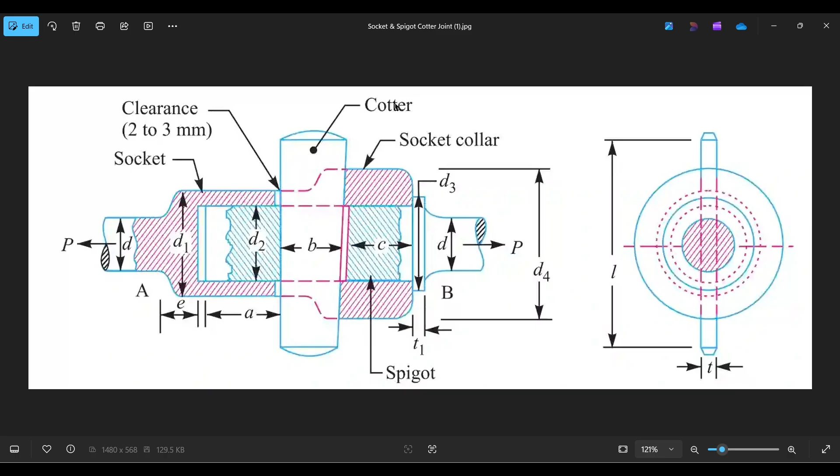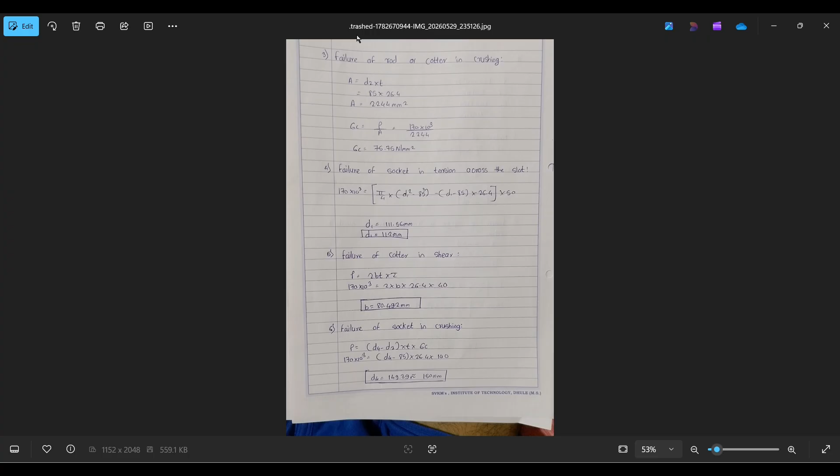These are the dimensions that we calculated to design the cotter joint. So okay, in your screen you can see these are the calculations that we did. All these calculations are required to design the cotter joint, to give the dimensions to each and every component.

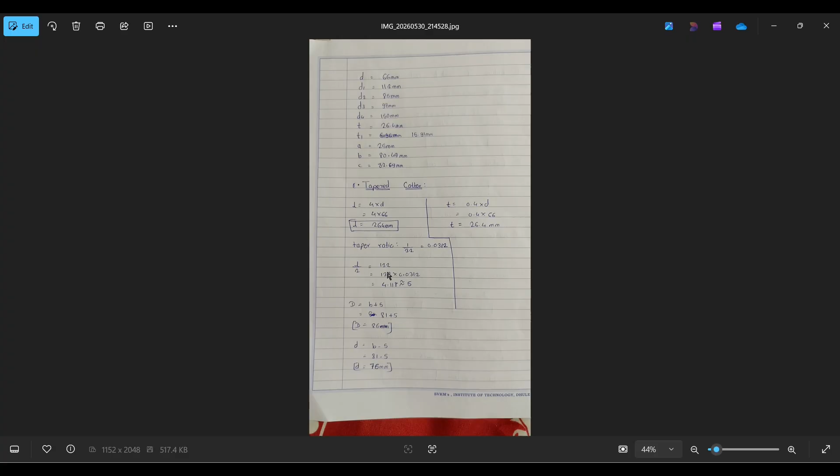So this is the last page and all the dimensions are given here, and also we calculate the dimensions for the taper cotter: the length and the thickness and other dimensions to design the taper cotter. Okay, so now we are going to design the cotter joint. For that, go to file, new, part.

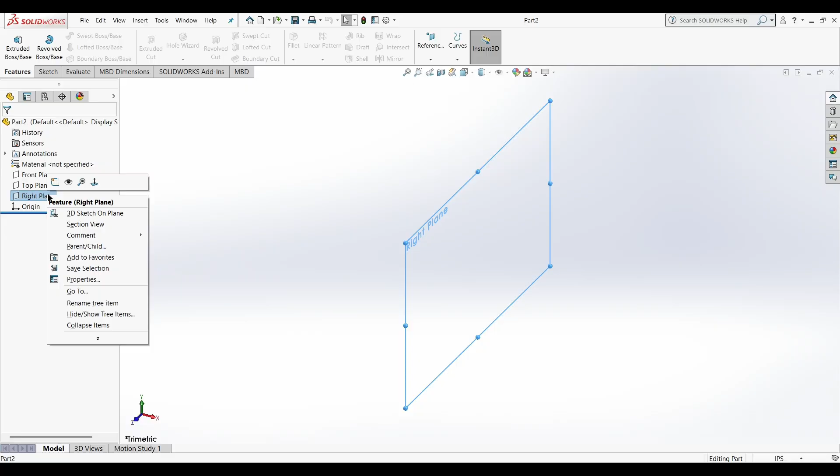So for that, click on the right plane, edit sketch, go to the sketch and select the circle, draw one circle here, and also make sure that the unit is in mm. So again, right click on the sketch and say edit. So give the dimensions. First we are going to design the spigot, which is one of the components of the cotter joint.

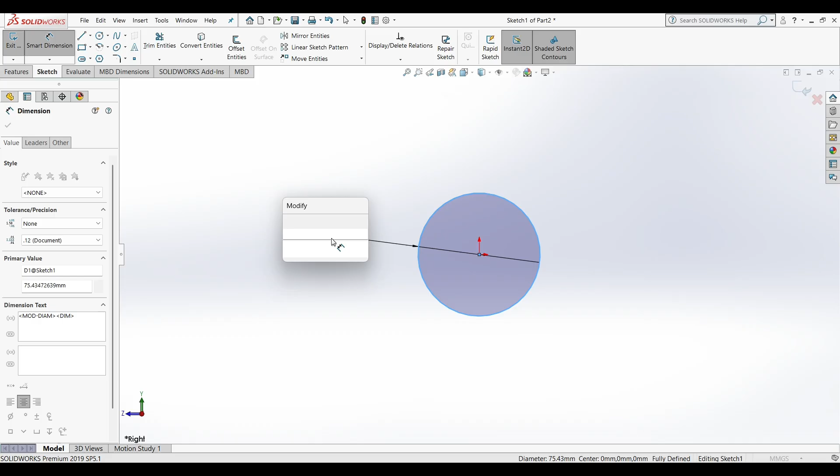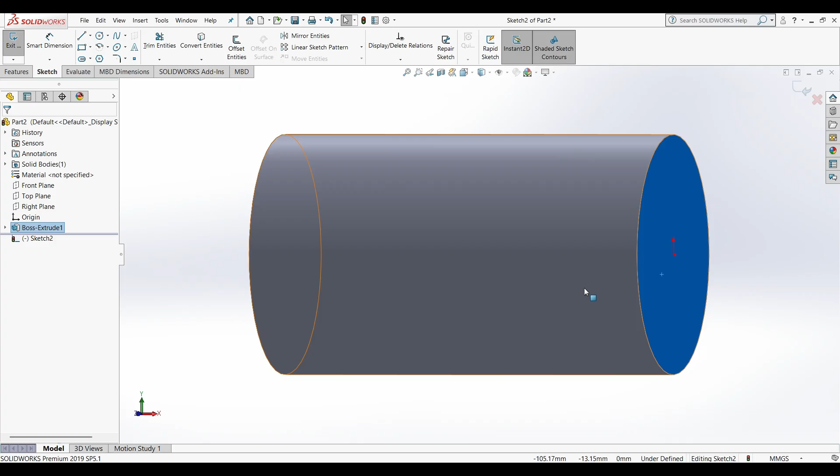Assign the dimensions. This is 85 mm. Say yes. Go to the feature, extrude base boss. The length of this spigot is 145 mm. Okay, say yes. Now select the surface of the cylinder, edit sketch, draw one circle here, go to the dimensions, give the dimensions. It's around 97 mm. It's the collar of the spigot.

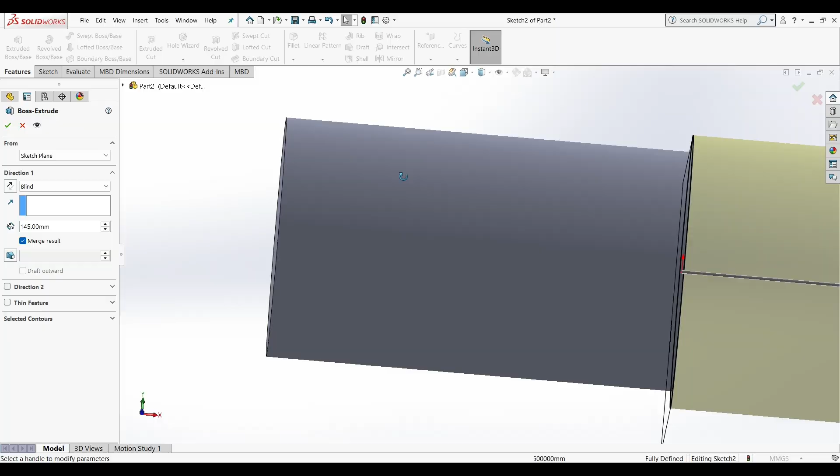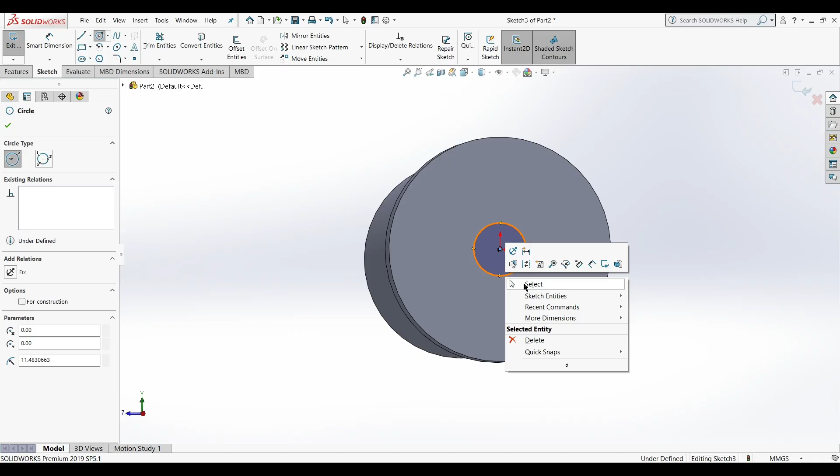Go to feature, say extrude base boss. This is 16 mm. Say yes. Now again click on this face and say sketch. Again draw one circle. This is for the rod, the rod of the spigot. Okay, so assign the dimension. This is 66 mm.

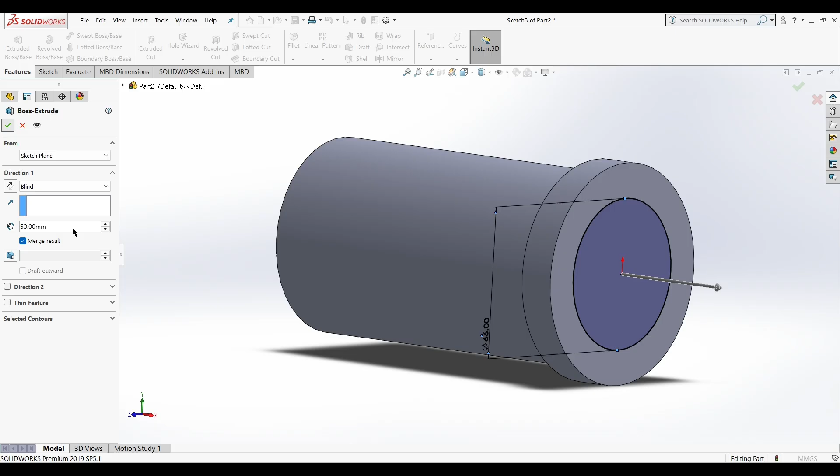Go to feature again, say extrude base boss, and we are giving the length of the rod as 50 mm. It's up to you, whatever length you want to give the rod. So we enter 50 mm. Now the last step to design this spigot is to create a slot to insert the cotter, the taper cotter. For that we require the slot. So now we are going to do that.

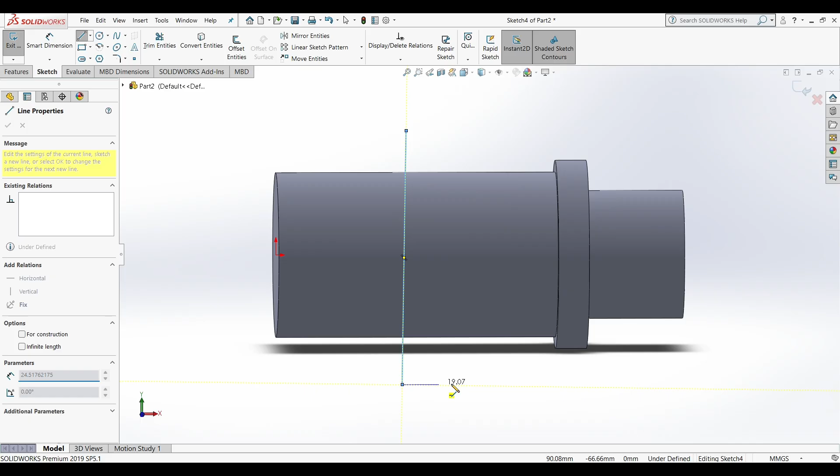So go to the front plane, say sketch. Now take the line and make this 2D sketch. Make sure this is vertical and these two, upper and bottom, are horizontal and parallel to each other. Say yes. Now assign the dimensions. This is 264 mm.

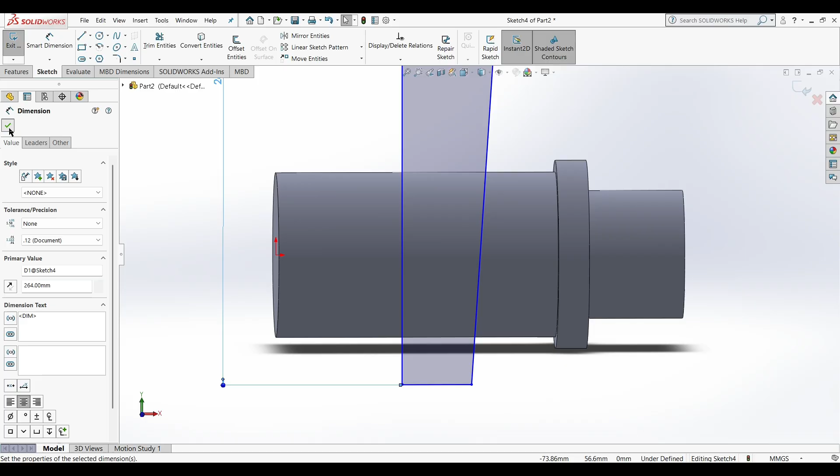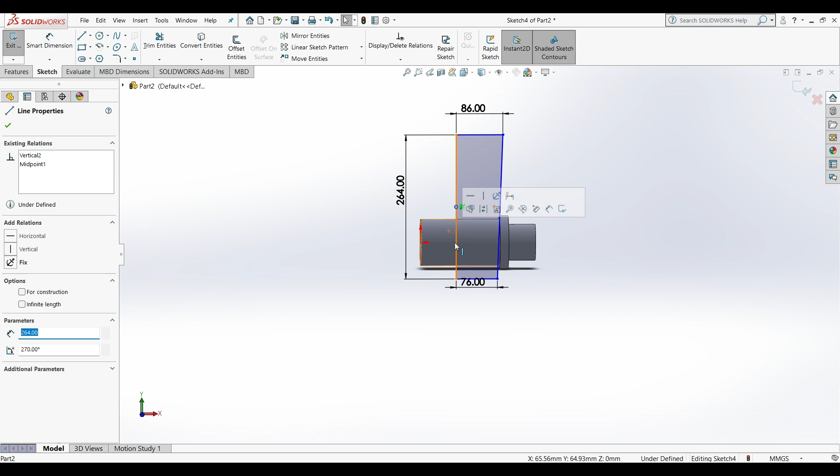Okay, this is 76 mm, and this is 86 mm. These all dimensions we already calculated. Now what we have to do, this corner we have to adjust in the center, the center of the cotter. So click on this point, press Ctrl and click on this origin and say horizontal. So now you can see it's properly aligned.

Also give the dimensions for the distance. For that, click on this point and also this one. This distance is 35 mm. In this distance we also added the clearance. So now go to the features, say extrude cut, sorry, not extrude base boss.

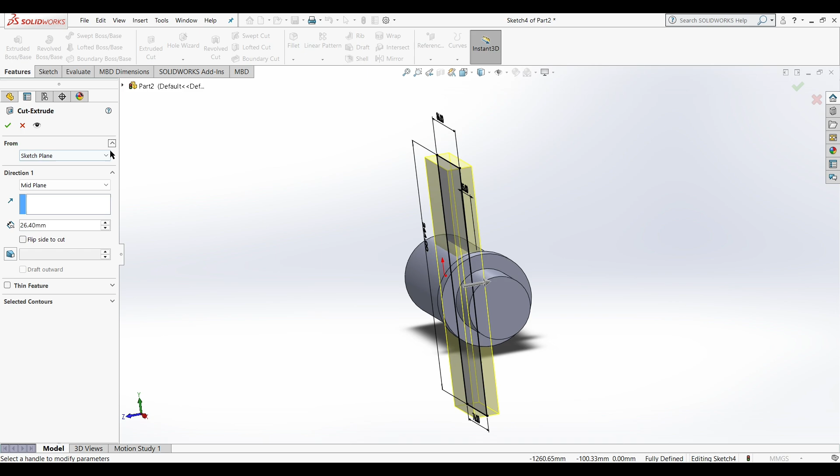Here click, select the mid plane, and this is the 26.4 mm thickness of the cotter. So you can see it's proper. Now say yes. Now you can see the slot is perfectly created. Okay, so our spigot is done. Now just save this spigot, make one folder and save this.

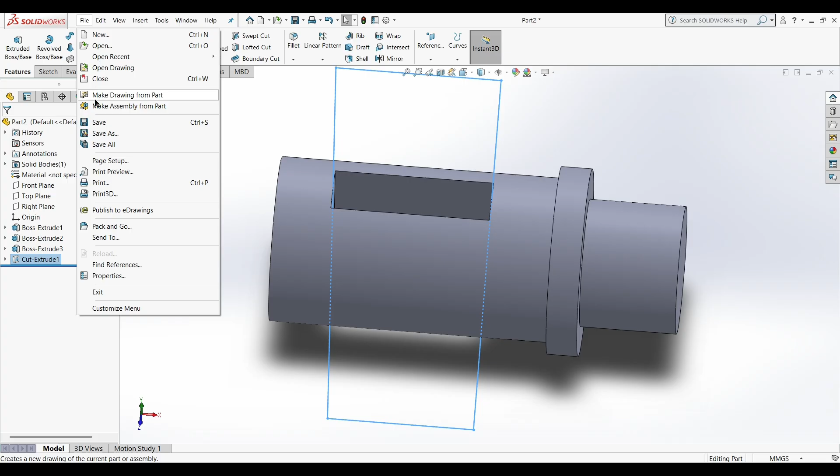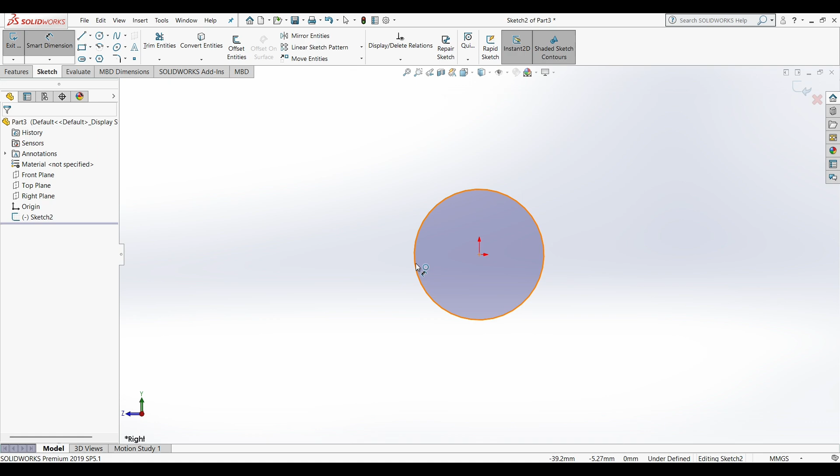Okay, so now again open new, say part. So now we are going to make the socket. For that take the right plane, say edit. Go to the circle, select a circle, make one circle here. Also ensure that the unit is in mm. Go to the sketch, take smart dimension, give the dimension. So this is the rod of the socket.

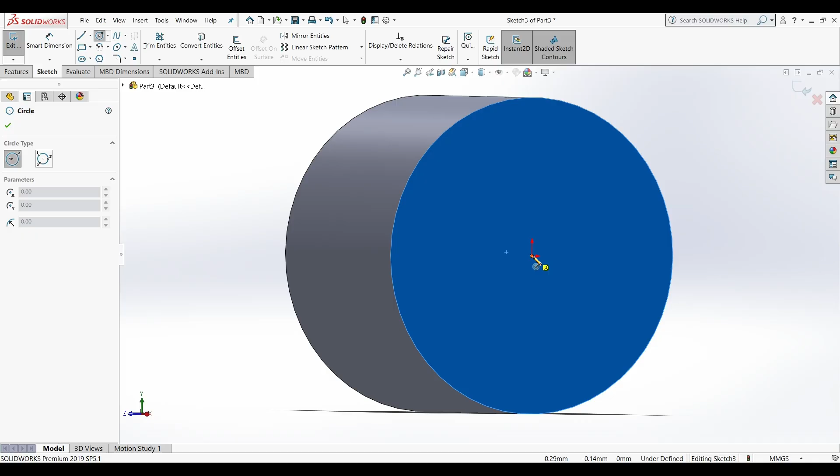Go to feature, extrude it, and it's around 50 mm. Say yes. So our rod of the socket is ready. So now click on this face and say sketch. Again, take a circle, make one circle here, go to dimensions, and assign the dimensions to the circle.

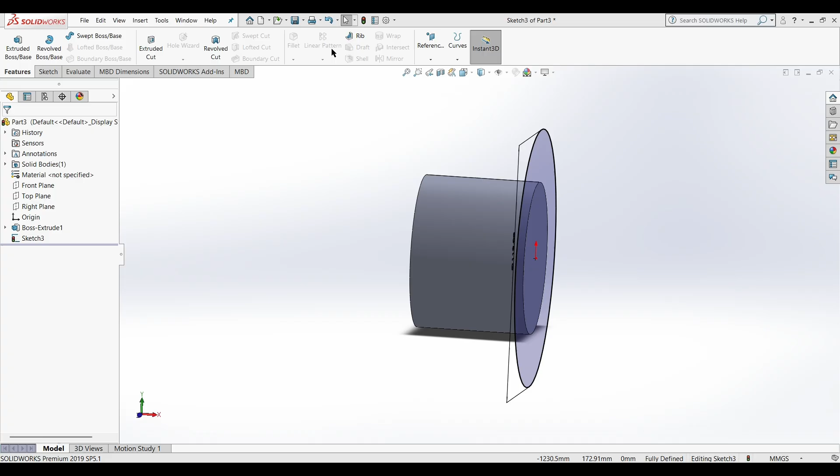The diameter of socket is 112 mm. Say yes. Extrude this, go to the feature and say extrude. So this length is 200 mm. Say yes. Again select this face, say sketch, draw one circle here, go to the feature, say extrude.

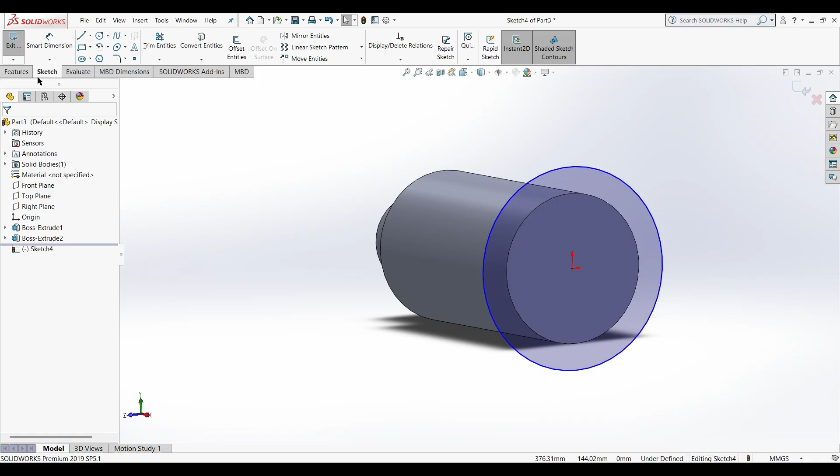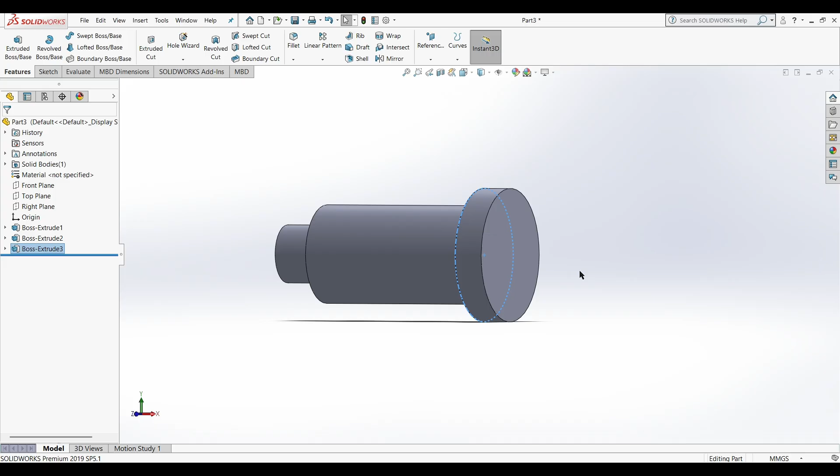This is the collar of the socket. It has 33 thickness. Sorry, not 30, yeah, 33 thickness. Okay. Again click on this face and say sketch. Now draw one circle here and assign the dimensions to the circle. It's 85 mm.

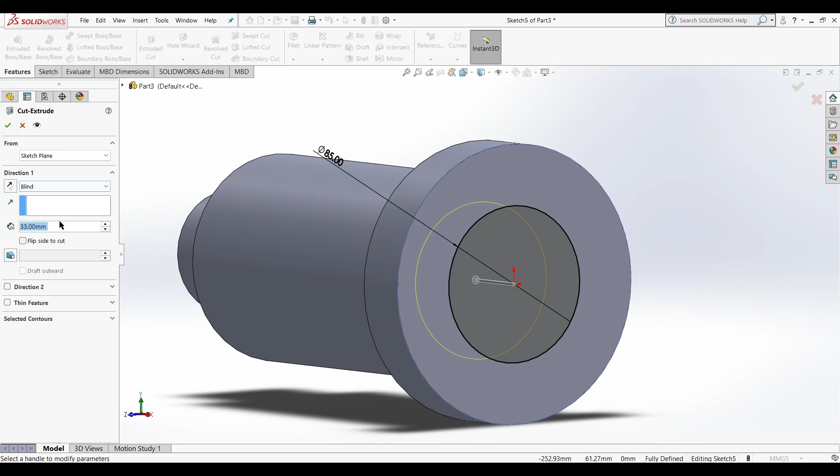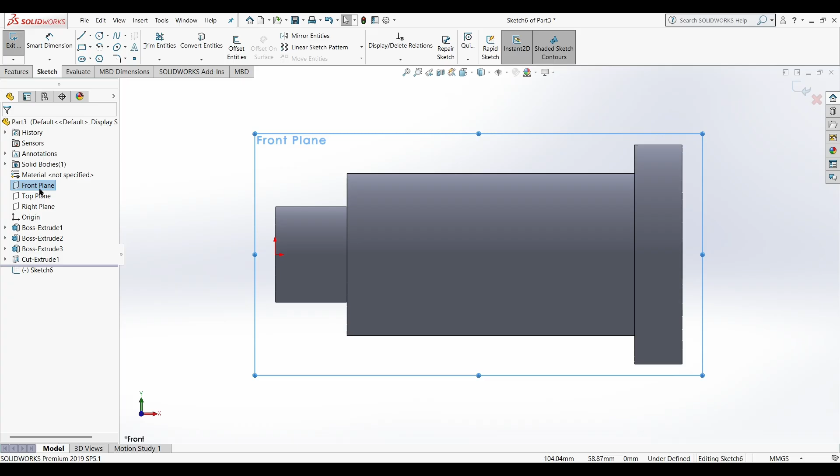Go to the feature, say extrude cut. It's around 145 mm. Say yes. This length and diameter is same as the spigot because here the spigot gets inserted when we do the assembly. Now we have to make a slot for the cotter. Click on the front plane and say edit. Now make the cotter as we made it for the spigot. Same cotter you have to make here.

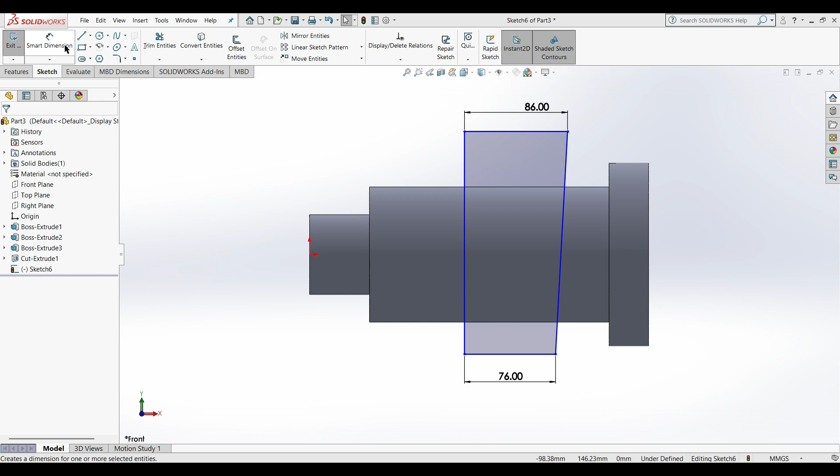Okay, so this should be vertical. This is horizontal and parallel to, or not equal, delete this equal, parallel to each other. Okay, so assign the dimensions. This is 76 mm and this is 86 mm. Okay, also assign the length of the cotter, which is 264 mm.

Okay, so now bring this cotter at mid of this socket. Click on this point, press Ctrl and click on this origin, say horizontal. Now assign the distance between them. So click on this point and this one, and the distance between them is 2 mm.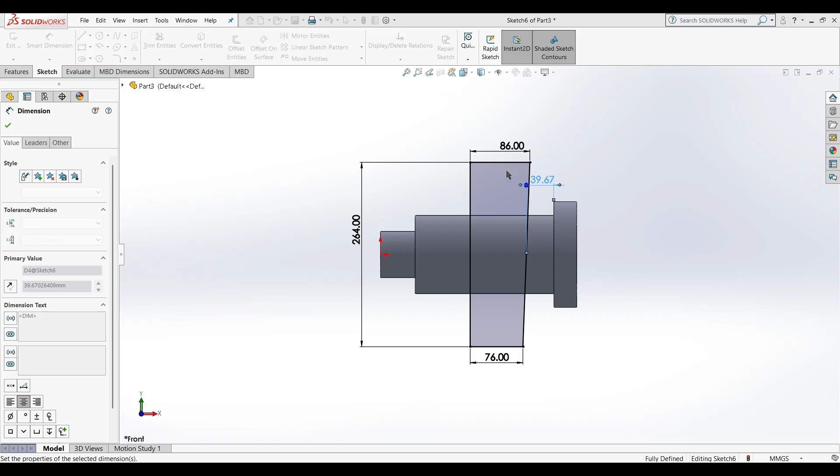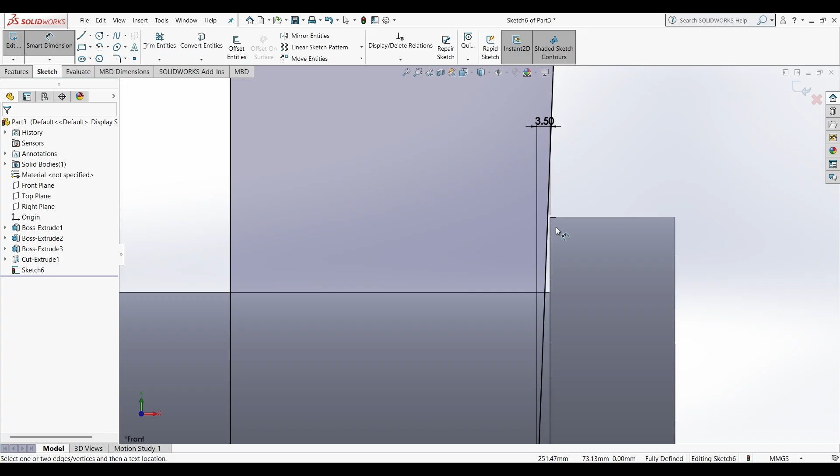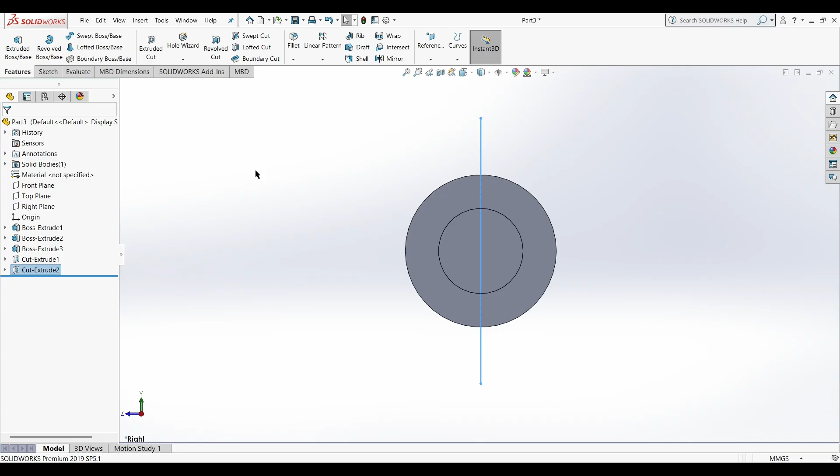Okay, so they are intersecting each other, so increase the distance 2.5 mm, again 3 mm. So increase a little bit, 3.5 mm. Okay, now it's better. You can see here's a gap between the cotter and this collar. Now go to the feature, say extrude cut. Say mid plane, and the thickness is 26.4 mm. Say yes. The slot for the cotter is ready. You can see here, and save this part.

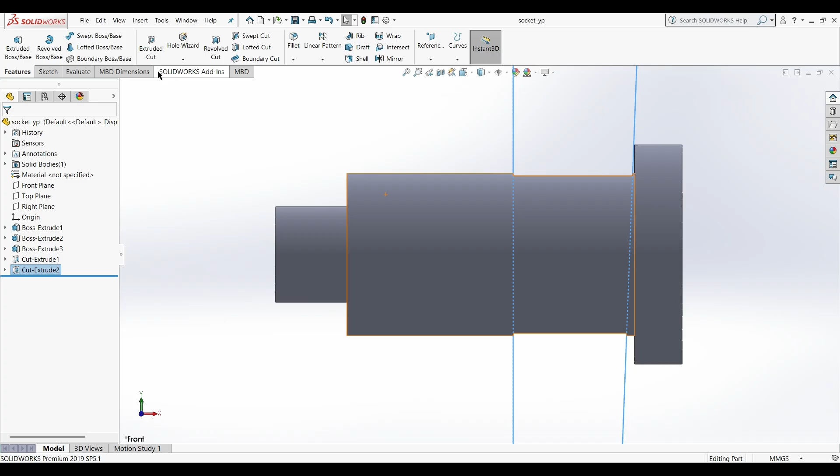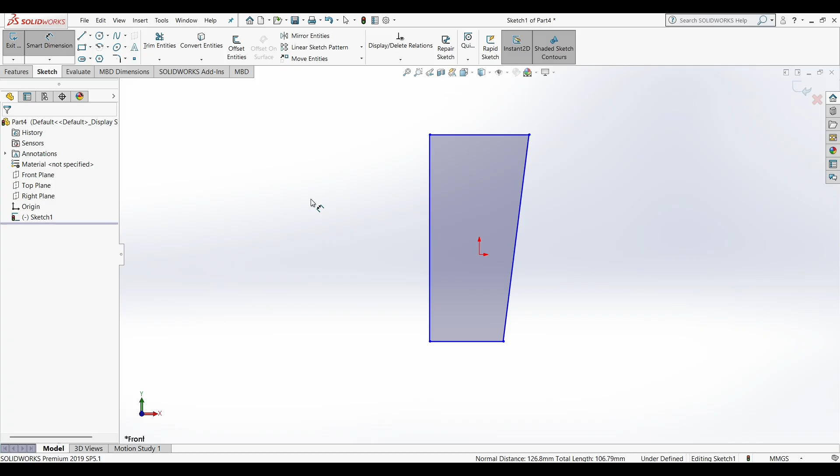Okay, save. Now go to the file, take new. Click on the front plane. Now the last part, which is the cotter. So make these lines. Ensure that the unit is in mm. This should be vertical, and this should be horizontal. Now assign the dimensions to them. 264 is the length.

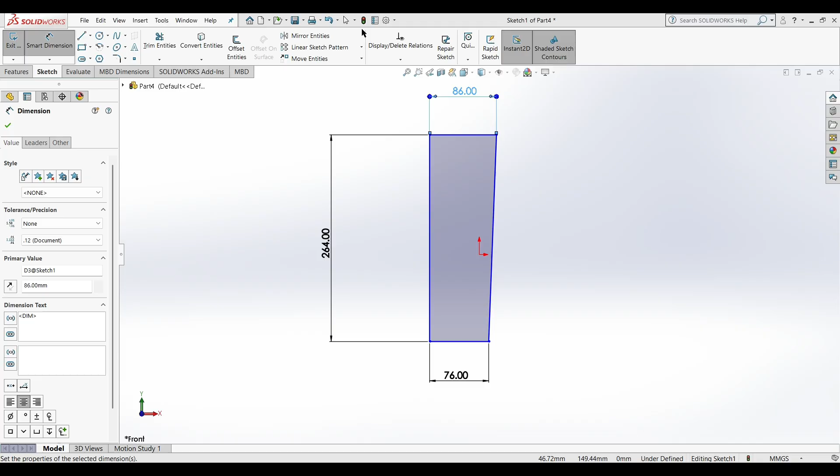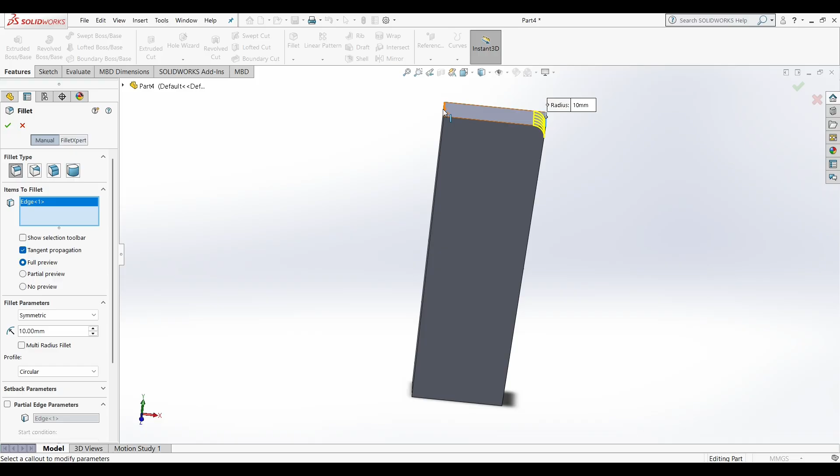This is 76 mm. This is 86 mm. Just a minute. Okay, so now click on yes. Go to the features, extruded boss/base. Select this mid, and thickness is 26.4. Okay, so our cotter is ready. You can also give the fillet to them. Select these edges. It's up to you. But here I gave the fillet. It looks better.

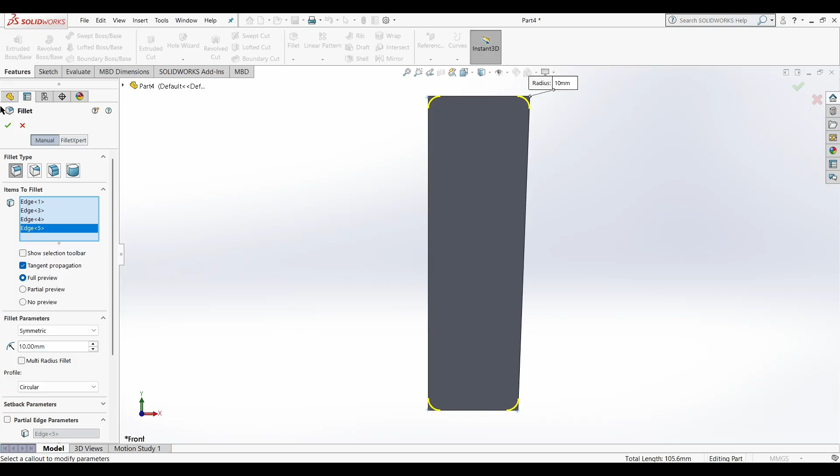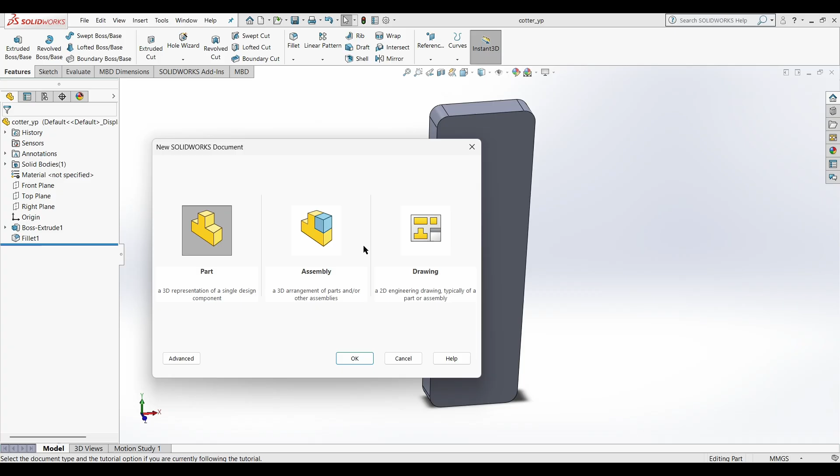Now save this. Say cotter. Okay, now our three parts of the cotter joint are ready. Now go to the assembly. Click on the assembly. Say yes. Now insert all those parts. Delete this one. This is not our part.

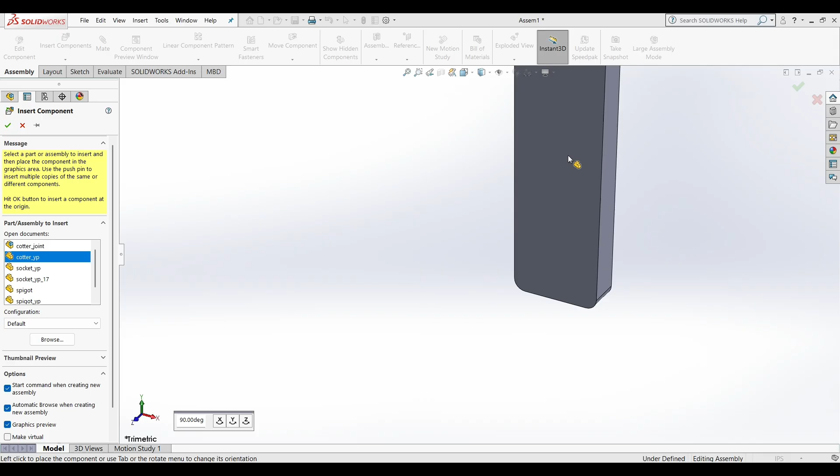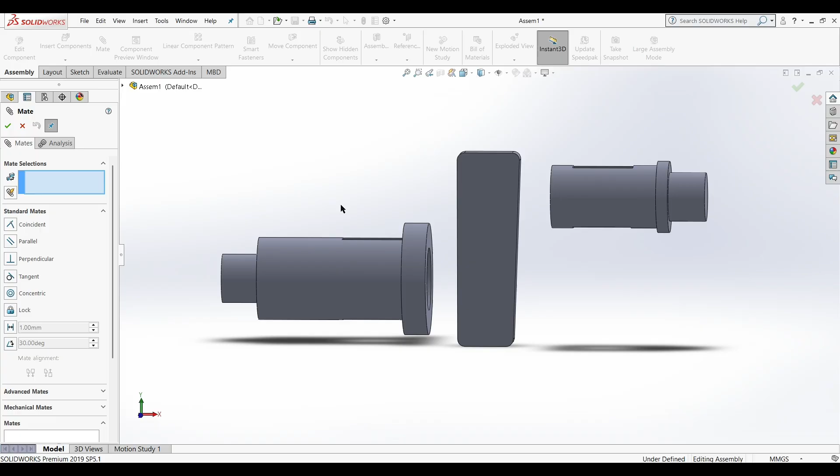To insert the part, go to the assembly, insert component, here cotter. Again go to insert component, socket, and the spigot. After inserting the components, go to the mate. Now assign the mates properly. Select this face and this face. After that, this inner face of the spigot and this face of the socket.

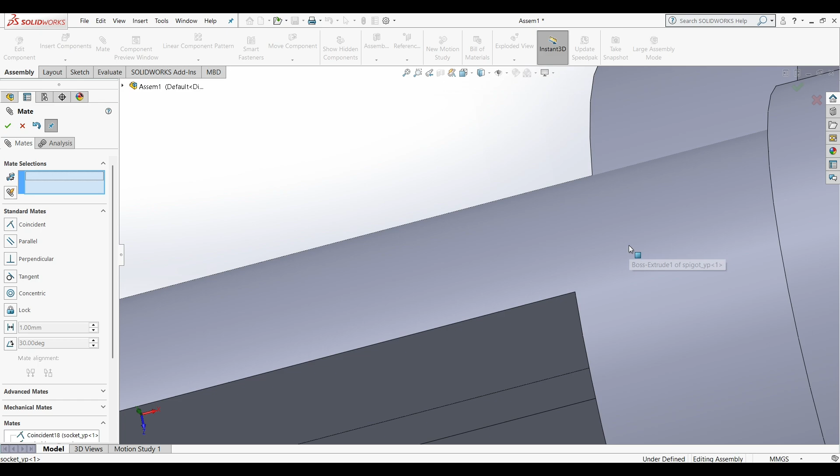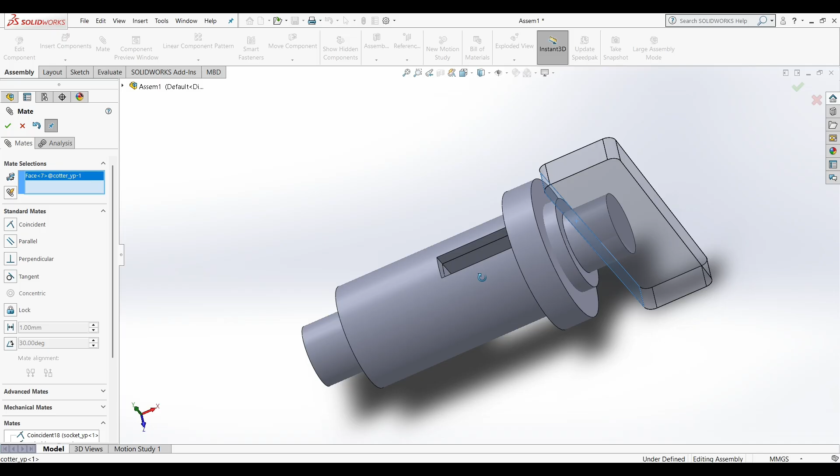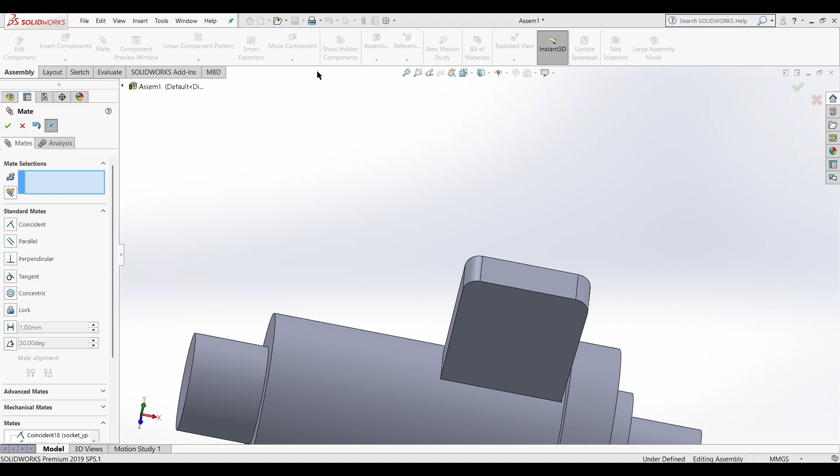And again this face and this inner surface. Say yes. So our socket and spigot are aligned. Now click on this face of the cotter and this face of the socket. Now click on this face and this inner face. Say yes. So our assembly is done. You can see our assembly is done.

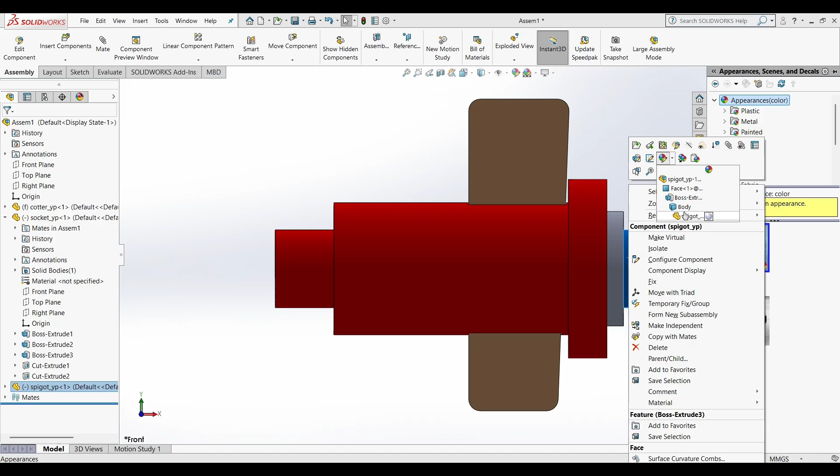Now we can also assign the colors as per our requirement. Whatever color we need, to the cotter, or this one, and to this spigot. Say yes. So our cotter joint assembly is ready. So in this video we made all the parts of the cotter joint and we did the assembly.